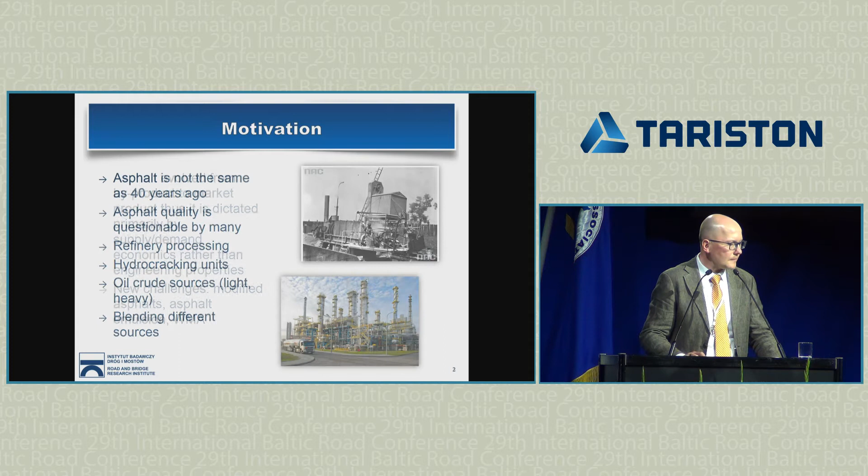Also asphalt evolved from what is called a byproduct—maybe when it started 100+ years ago it was just the byproduct of the crude oil refinery process. But right now it's really the product, the market product, governed by economics. And sometimes this economics is more important than the actual properties or engineering properties, at least from my perspective.

And also there are different challenges. We have newer modified asphalts, new additives added for a variety of reasons. Some of them may help, some of them may not—they may actually threaten some of the other properties, or affect them in a negative way. But also we have sustainability, the new big themes that we have to satisfy with our materials.

And also the other part of the motivation is: how do we check the quality right now? One of my favorite books is actually over 100 years old and talks about asphalt pavements, and these pictures are from this book. As you may recognize, this is an early version of the penetration method. The book is from 1920, and it talks about the penetration test, how it was developed in 1888. So almost 130 years ago, at least in Europe, we used this over and over again as one of the major checks for grading binders or asphalt.

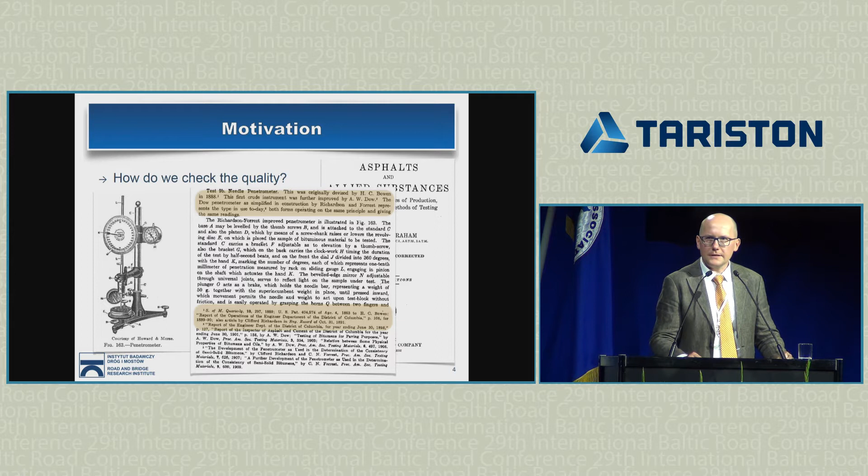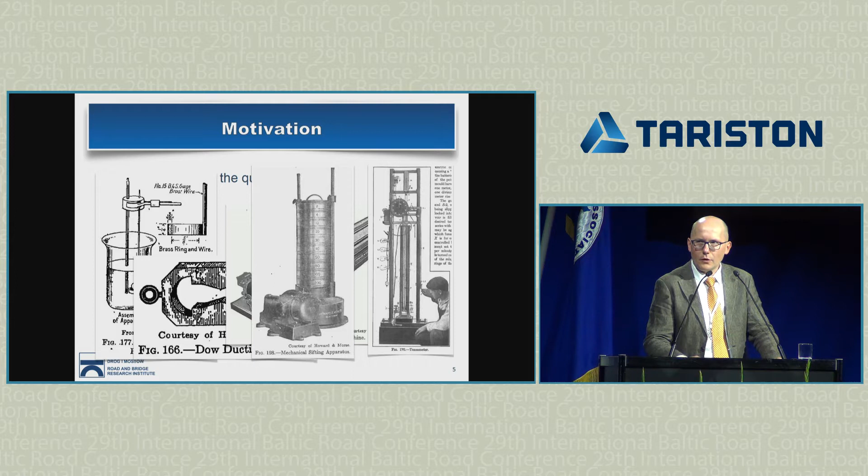And the other pictures, you may still also recognize them from the same book. There are different methods that we sometimes use even these days - sieve analysis, some tensometer, or some small load press. We have to realize that these are over 100 years old methods. For me, it's kind of bizarre.

In an even older book, from 1913 if I see it correctly, it says that even in those days, during the rapid development of cars and automobiles in general, the asphalt pavements or roads in general were undergoing a major change, or at least they were supposed to, because of the new cars, new methods, or materials and how they are actually used.

It's kind of amazing that they said this in this book, over 100 years ago. But looking at the pictures in this book, I mean, we didn't really progress much, yes?

And how come - we have this, as already mentioned this morning, new concept: automated cars, truck platooning, and different electric cars. And we, on the other hand, looking at the infrastructure, we're using something that is 130 years old.

I don't quite sometimes understand this, but I believe that we can do better, yes, with chemistry-based methods, for example.

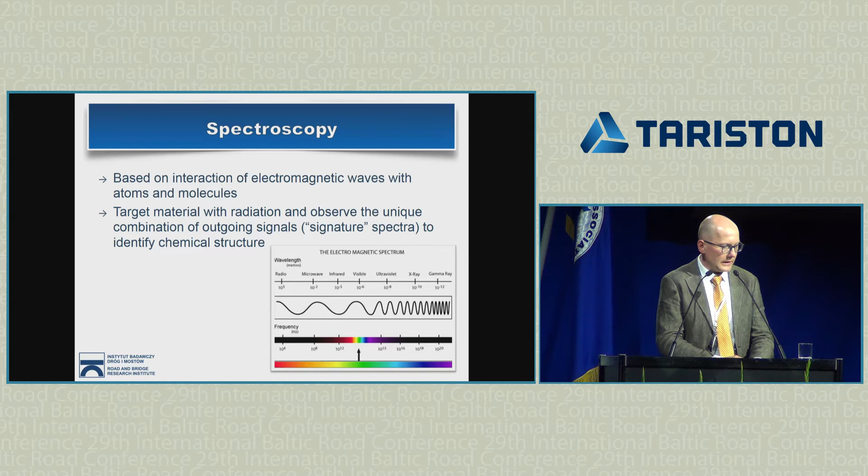You just direct the light at the sample - maybe it's easier on this next slide - and then not just the light, but the particular frequency of the light, in one of the regions, either X-ray or infrared or near-infrared or other.

And then when the light is interacting, there is some phenomena that is a clue to each of the different methods we will discuss. This is the clue, because each light or each frequency causes a different phenomena happening in the material. And then we have some sort of detector, typically, to look at what is coming out after interacting with the material. We have to measure, of course, what is going in, and then we have to measure what is coming out from the material.

And then we record this or interpret this into some meaningful information. Of course, each of these steps still has some changes because these methods, devices, or methodologies are still evolving. This is part of material science that works on these kinds of materials. We as engineers should use at least the ones that are more established, and look for new developments as they are approved or established with time.

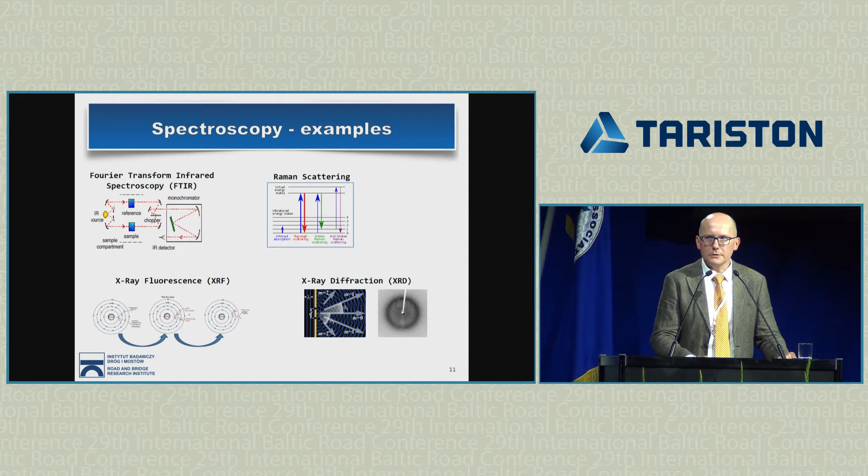Some of them are not suitable for asphalt due to its nature or composition, but when we talk about soils or cement, some of them are perfect for these materials. So there is some knowledge behind which method is better or more suitable for what material. But this information is out there - it's not a secret which method is good for what.

So we can talk about the thin layer first. I didn't do anything - so this is not my presentation. Okay, oh, this is my presentation. A little bit up. Slide number 12.

So when we start, not with a typical spectroscopy method, but we talk about chromatography, it's a little different part of analytical chemistry. If I can simplify this, it's like a sieve analysis for our material - in this case, asphalt. We do the sieve analysis to see what is inside our asphalt, what is bigger and heavier, what is lighter, what fractions. As you may remember, we have SARA fractions - asphalt is composed, at least in some theory, of 4 fractions that we can separate or detect using chromatography.

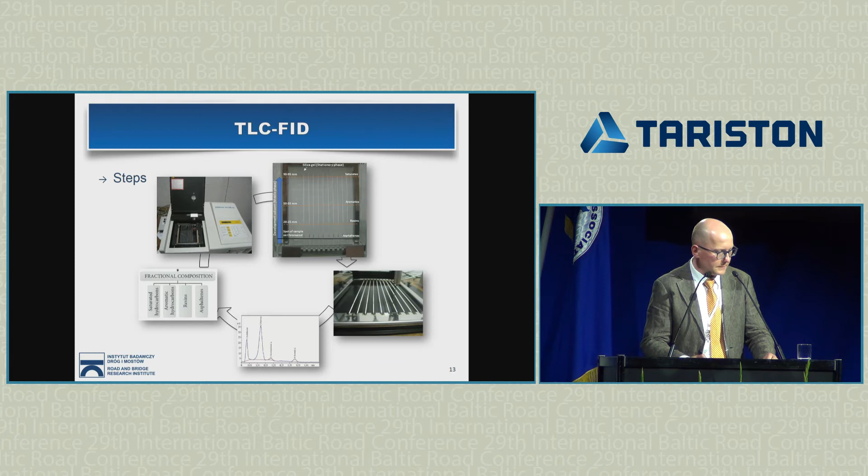With this, you can obtain the spectra shown at the bottom of the slide, which will show you most of the time 4 peaks for unmodified binder. If you calculate the area under these peaks, the area is proportional to the content of these fractions inside the material. So it's a fairly easy method - of course, the devil is in the details.

There are some details you have to work through, and there are different approaches even within this methodology, depending on who is using the device. But in general, the consensus is that it can give you the SARA fractions, and the SARA fractions are related to the performance of the asphalt.

So if you didn't do this exercise - in the original SHRP study in the United States, they actually measured the SARA fractions, of course with a different method than this one, but they do measure them.

And then they build the pavement sections with these different asphalts, and then you can try to correlate how these different fractions affect, assuming everything else stays the same, the performance of the pavement sections. And here are some of the results.

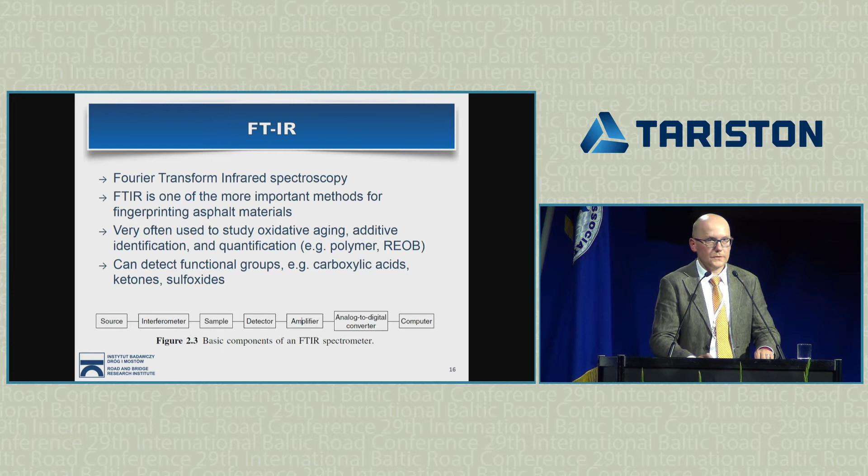We know that due to certain phenomena like aging, we can expect the growth of certain functional groups in our material. So when we observe these particular regions, which are very well established, or according to some of my colleagues, you can calculate where they should appear, then you can observe the sensitivity of different asphalts to aging and see how these functional groups are growing, and how fast. So you can detect functional groups like carboxylic acid, ketones, or sulfoxides, and they are all related to a particular place on the spectra.

To understand a little more how FTIR is measured: you radiate the material with infrared light, so the frequency is controlled by the machine. Then the molecules absorb some of this light, and on the detector you can measure how much light was actually absorbed by the material. Then you can plot it in the spectra, plotting the amount of energy absorbed versus the frequency.

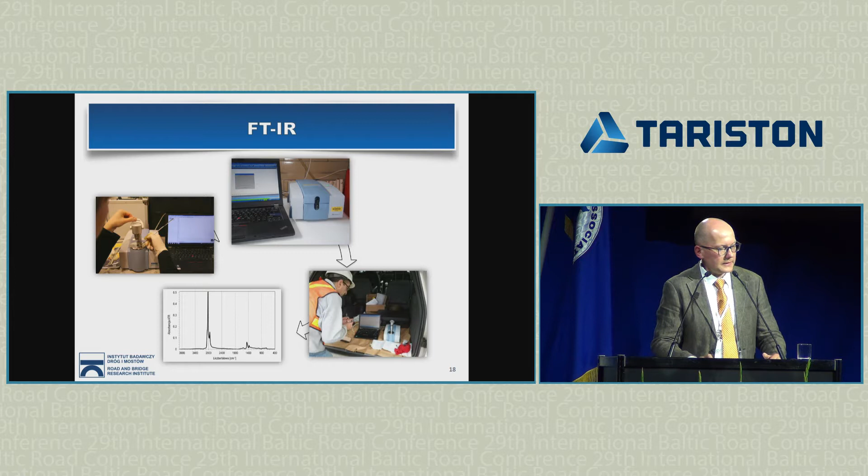The problem a little bit with this method is that this absorption of light by the molecules causes vibration of the molecule bonding. There is a whole theory that this vibration can cause stretching or bending of the bonds, or it can be symmetric or asymmetric. At least at the beginning, this might be a little overwhelming information.

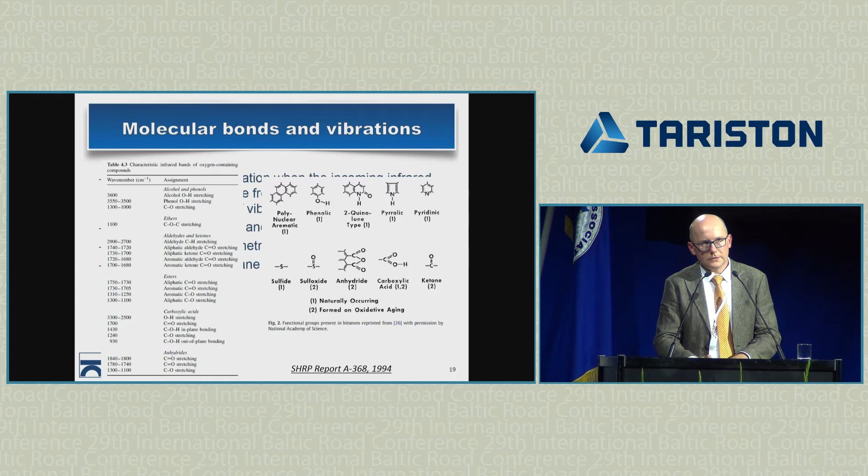You can see here from the SHRP report as well what type of classical molecules you can recognize in the asphalt. Some of them have very well-defined locations where they should appear on the IR spectra. Here you will also see the frequency on the left-hand side along the y-axis, and you can also see some overlapping.

Sometimes if you add an additive that overlaps or partially overlaps with one of the well-established regions in asphalt materials, the interpretation might be challenging. But in general, this is not the case, at least for regular applications of the IR.

There are a few different methods of IR. I will not go into details of this. You can do it in transmission mode typically, or attenuated total reflectance, and they are depicted on this figure and also in the paper. Plus, you can use diffuse reflectance.

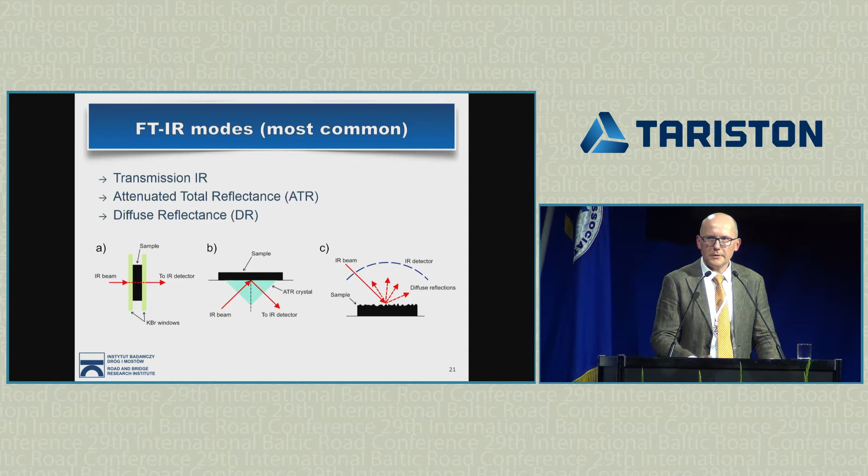The sample preparation is very simple, at least in the ATR mode. You just put the sample of asphalt, stick it to the window, a small window about 2 by 2 millimeters, and do the measurement.

And the last method is XRF, X-ray fluorescence spectroscopy. This is used to determine different particular individual elements. So first, in chromatography, we had the SARA analysis. Then in IR, we have functional groups. And here we are looking at the individual elements of our material. So if we know what should or should not be in the asphalt, then we can use the XRF.

And here, as you can see, the examples are using this in PPA, or polyphosphoric acid modifications, or with REOB, recycled engine oil bottoms modifications, or crumb rubber. You will also see it in the asphalt.

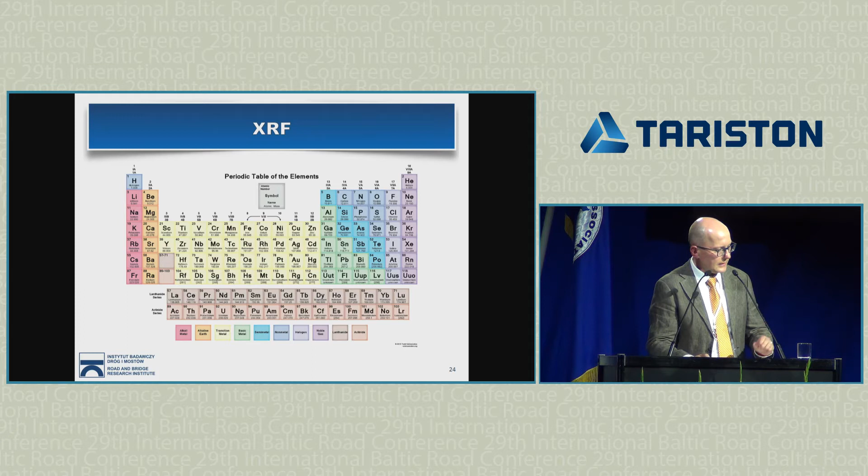In the previous slide, you could see XRF can detect everything from sodium to uranium in the periodic table. How it works is when you direct the X-ray light at the material, the atoms change energy levels. When they change energy levels, they emit fluorescence energy, and you can measure and detect this radiation and its intensity. When you have both the radiation and the intensity, you can tell what elements are there and how many of them there are. So this is both a qualitative and quantitative method.

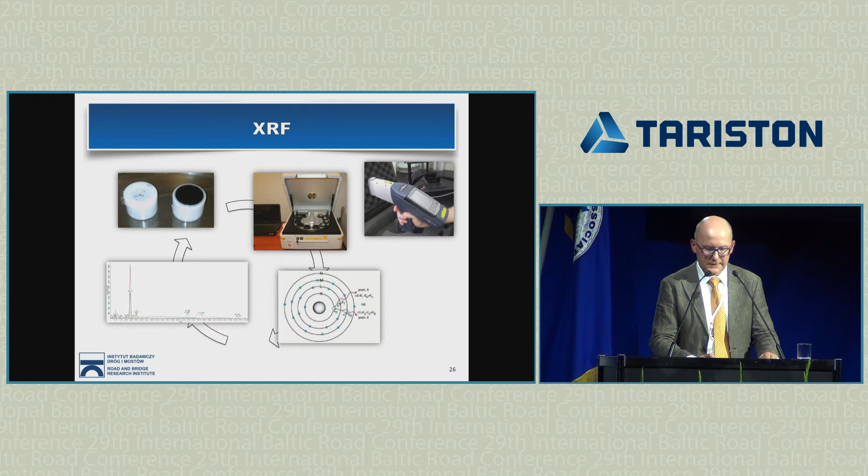Here, just to show you an example of the device, this is a stationary device with a carousel where we can put multiple samples, and you'll see the schematics of electrons jumping from one energy level to another. This is also an example of the portable device, similar to one shown in a previous presentation in the previous session.

Okay, almost finishing. We also have other methods you may hear about at different conferences, and maybe some were mentioned or will be mentioned here. You have ultraviolet spectroscopy, NMR, MS, TGA, DTA, different chromatography methods, SEM and FEM. Some of these overlap, but most of the time they have a very specific use, at least how we use them in the asphalt industry right now.

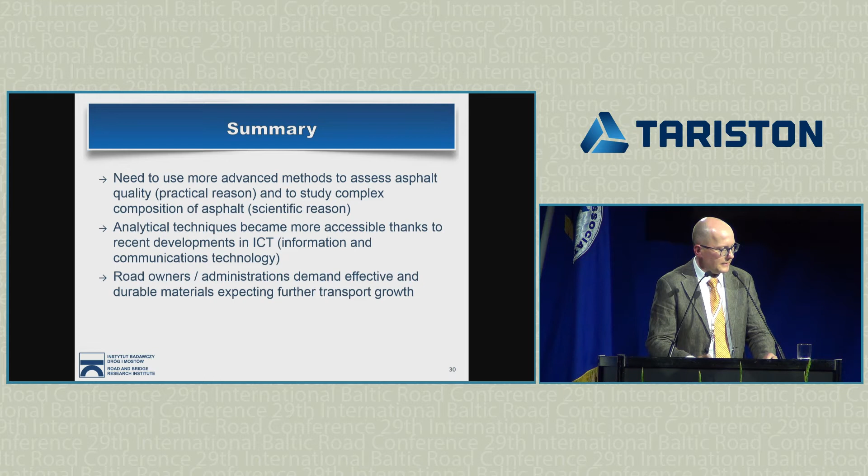So in summary, in my opinion, we use more advanced methods to assess the quality of our asphalt and study its complex composition. As I mentioned, these techniques evolve and are very small these days, very accessible. It was not the case like 30 years ago—some of these devices were the size of a room, or didn't even exist because the technology wasn't there. And road owners demand effective and durable materials because we expect growth in our transport.

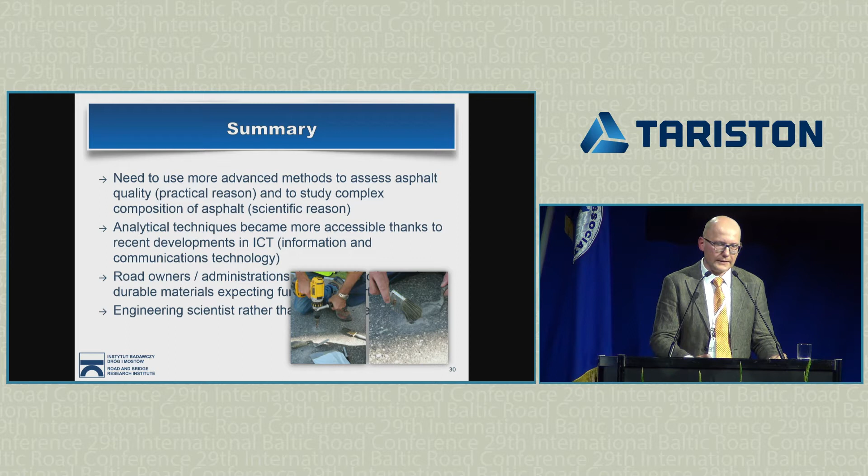And also, sometimes being a civil engineer is not enough—we should be more like engineering scientists these days, because we should understand a little bit of the causes, what is happening with our material. It's like this: we drill the pavement, for example, and just measure this dust, and you can do it with the FTIR. So no more cores, like 150 millimeters.

And going back to this caveman that I forgot to mention on my first slide—what I wanted to show is we just need to know how to use the right tool for the right job, the right application. This caveman knew he needed to use the hammer. The hammer evolved over the years, so he understood the concept of how to use it, and we still use the same hammer, which was okay in this case. But with some of the tools we use these days, it's not necessarily the case anymore. Okay, thank you.

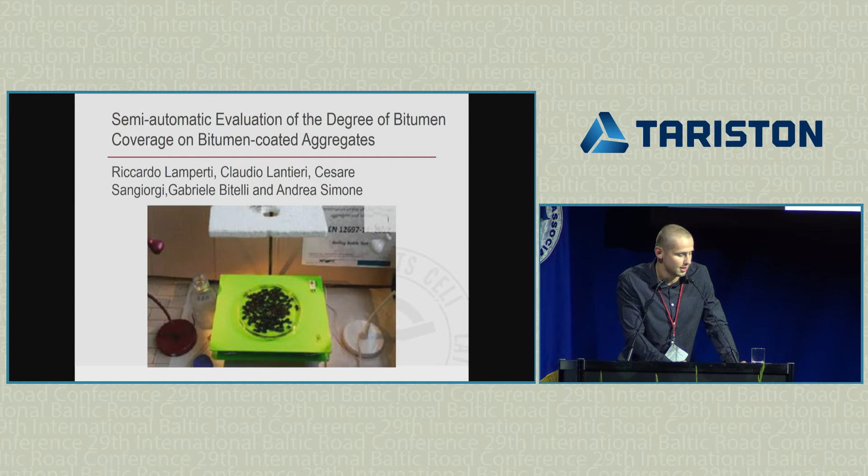So I used three kinds of different minerals in different colors: dark granite, red granite, and pale dolomite. And I mixed it with bitumen 70/100. The specimens were prepared by the standard, as you can see in the pictures of how I actually did it.

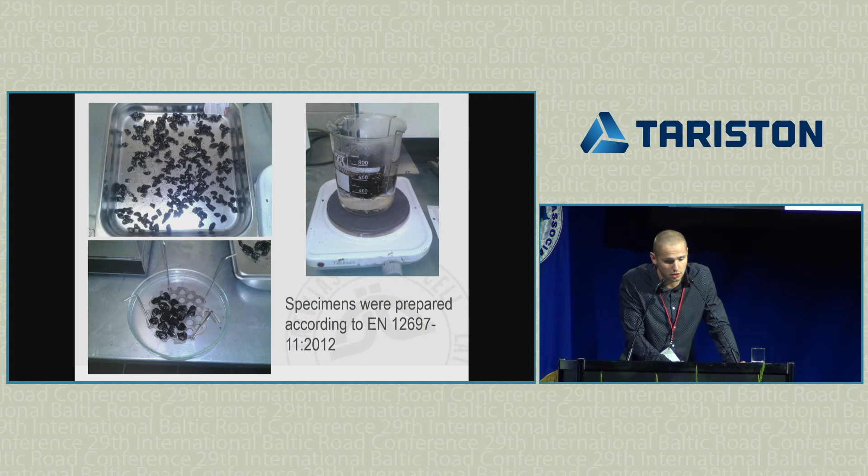For the processing, I used the program ImageJ. I selected it because those guys from Italy used it too. I thought I'd try it, and if it was bad, I'd try Photoshop instead. But I used this, and I was satisfied because it was very easy to use, so I stayed with it.

On the picture on the right, you can see my self-made photo studio. Actually, it's pretty simple—there's only two lamps, a bowl with water, and the specimen in it. On the left, you can see how the picture looks after I took it.

As I said, those guys from Italy had some imprecise things, and the main two problems were shadows from the minerals and reflection from the lights. So I tried to remove them, and I actually did it. I soaked my specimen in water, which helped take off that reflection, and I put the bowl with water and specimen up to 30 centimeters from the green background, which helped take off the shadows.

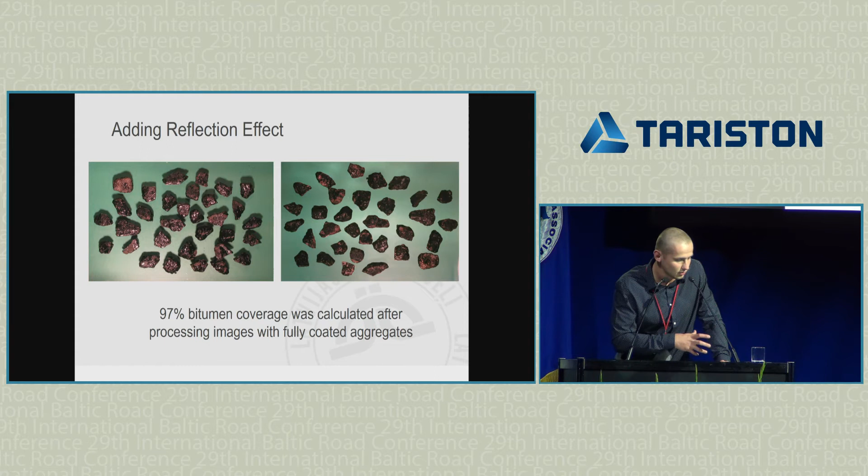But when I tried to calculate the coverage of bitumen with the photo processing method for fully coated minerals, I calculated only 97% coverage, meaning I had somewhere around 3% loss. I think there's a little spot from reflection, so I took this factor into calculating too.

Here you can see how I work in this program. Actually, it's pretty simple—we're just regulating three things: hue, saturation, and brightness with the regulators, and with them we separate the white spots from the black spots. Here you can see how I already separated the black spots from white spots, and down here we can see the calculated area which we need to know.

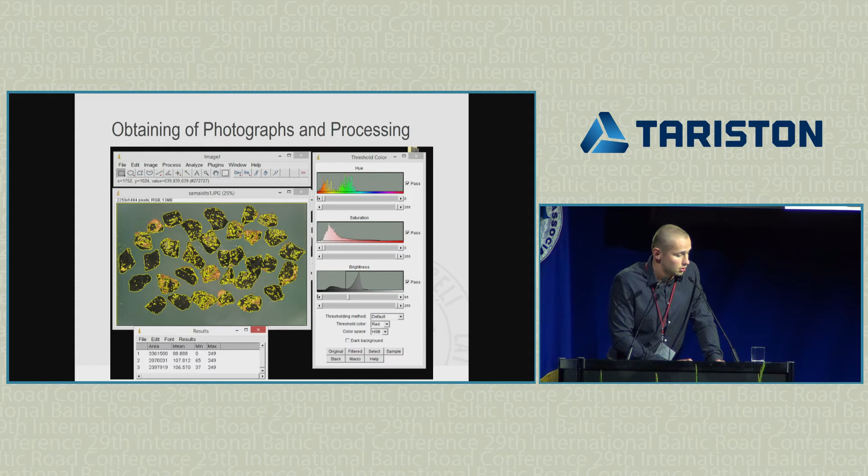Let's talk about calculations now. To calculate the coverage of bitumen, we need to know three areas: the whole area of the photograph, the green background area, and the total area of green background and spots covered with bitumen. If we know those three areas, we can calculate the mean coverage of the bitumen.

So the results. I tried to take photos in two different ways. The first type: I took a photo, then turned each mineral around and took a second photo. The second type: I just mixed the specimen, took a photo, mixed it again, and took another. The purple beam is the average result from three operators for the first and second side. The green beam is from the mixed specimen, and the beige beam is from visual processing. As we can see, for the dark granite, the difference isn't big.

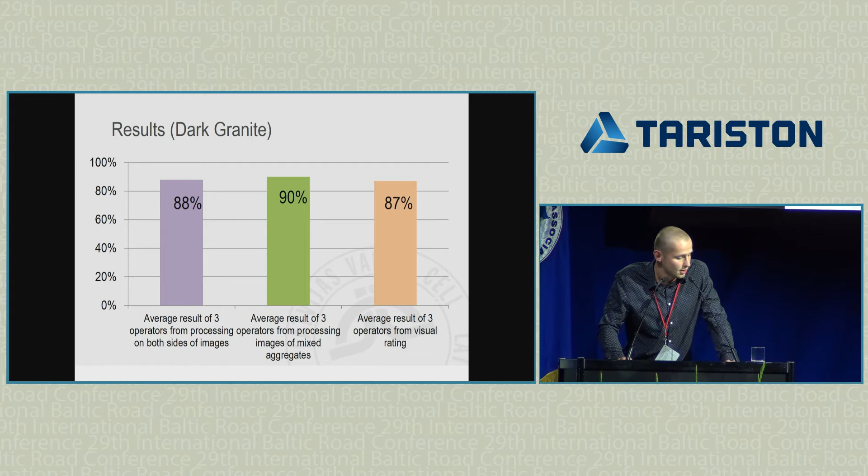For the red granite, the difference is bigger, about 7% between the visual method and photo processing. The photo processing method shows a lower bitumen coverage. And for the pale dolomite, the difference is the biggest, about 10%, which is significant.

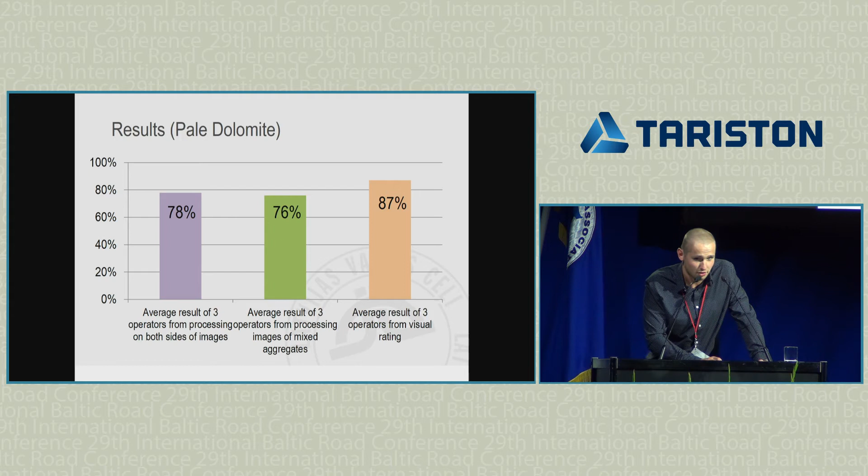So after those 3 specimens, I get some conclusions. First, in general, the photo processing method shows a lower bitumen coverage. Is it closer to the truth? I don't actually know. We need to explore it further.

If the aggregate is lighter, the photo processing method shows a lower bitumen coverage. As we saw for the dark granite, it was simple - pretty much the same.

Both image acquisition methods are equally accurate. As we saw for all 3 specimens, there was only a 2% difference between those two types of taking photos.

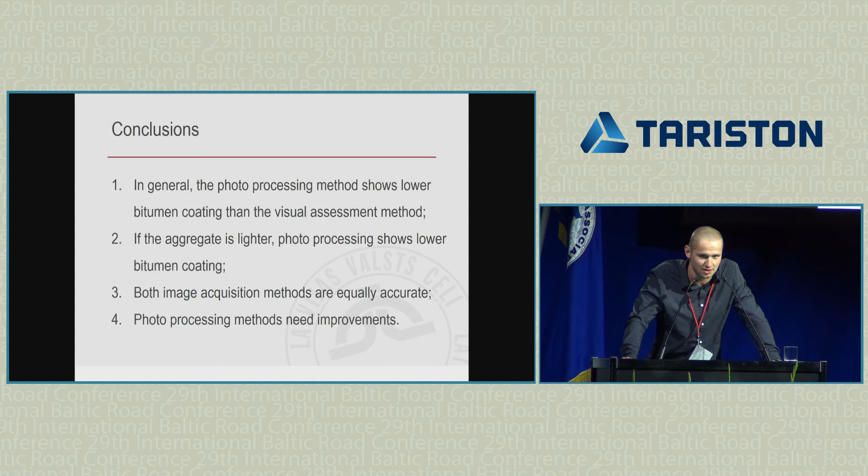And the photo processing method still needs some improvement. It's for sure, because in the future, as I see it, we will have only the specimen, put it in, then press some button, and after a few seconds we will have a result. I think the visual method is too old. We are moving forward - it's the 21st century, we have good technologies, and that's what I did. It's only one step, so we've got a lot of steps to do further. Thank you.

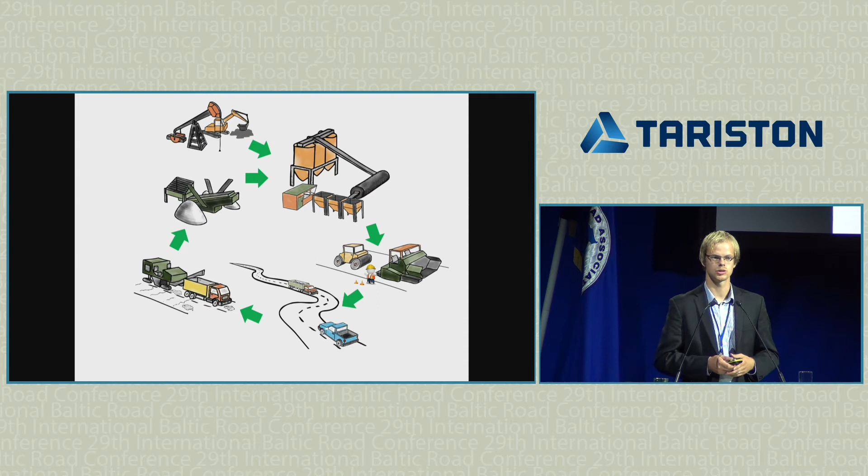And obviously, we want to pave and use the mixture as a normal road as we would do normally. So a rejuvenator is a sort of oil. It's not really rejuvenating the binder chemically - otherwise we would be using it on our faces and be forever young. But it does provide the mechanical performance of the bitumen that we want for another service period of the pavement. So we want some softening effect, we want to regain the elasticity of the binder, and so on.

The types of rejuvenators can be different oils, starting from, as someone mentioned here, waste engine oil. It could be a refined oil, vegetable oil, pine oil, or whatever. There's no real definition at the moment.

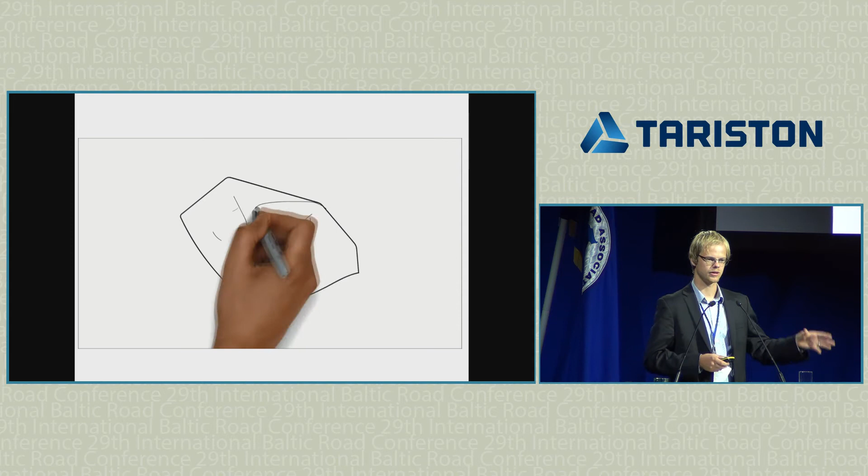Now the problem: if we have an aggregate covered with a binder film and we apply a rejuvenator on it, the rejuvenator is covering the binder film from outside. So in order to blend together, it has to first diffuse into the old binder film. And that's not really so simple, because the diffusion and mixing process will depend on the aging state of the old binder, on the rejuvenator itself, and on the temperature used in the mixing plant.

It will depend on the time of exposure to temperature. So there are all these factors that affect the result. And the result will, in most cases, be blending or binder activation somewhere between 0 and 100%. We probably will not be able to activate 100% of the old reclaimed asphalt binder.

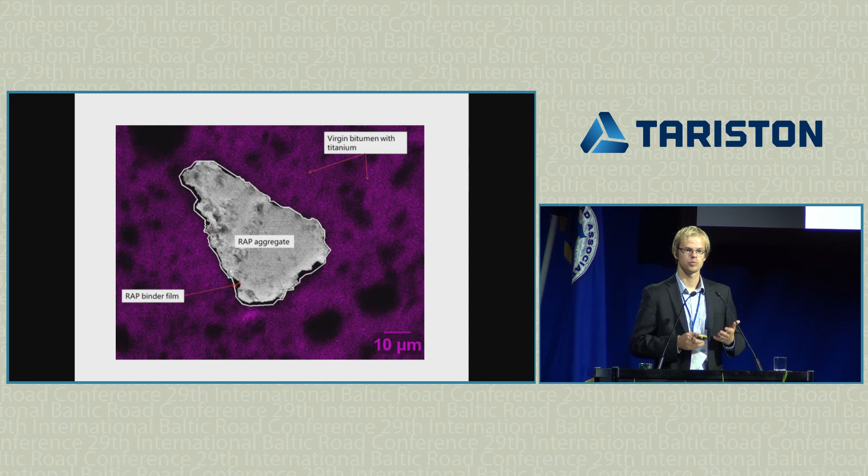So the question is how to do it the most efficient way. Of course, there are different rejuvenators, different plant technologies, but one thing we have to decide is how to add the rejuvenator. The normal way, or traditional way, is usually after heating of the reclaimed asphalt, in the mixing drum, there's an additive dosage system. So we can add the rejuvenator there.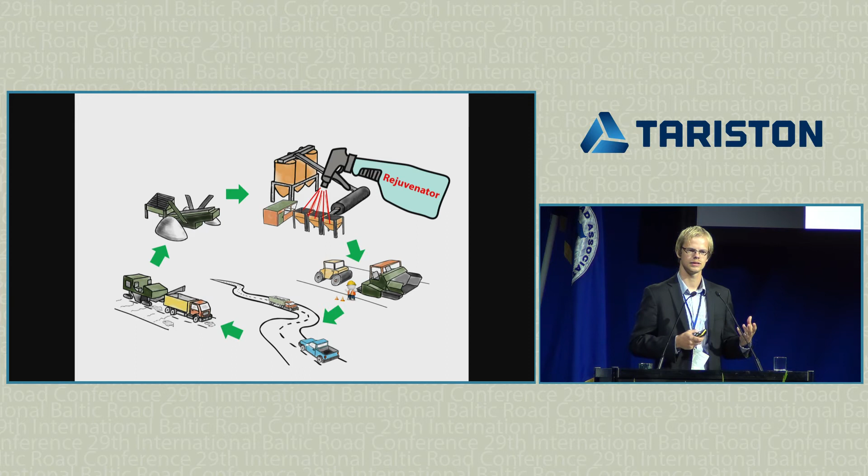Sometimes it's also added to virgin bitumen. This would be kind of creating your own soft binder grade. But who is to say that we cannot add it earlier? The longer the rejuvenator is in contact with the binder, the more diffusion we will have, the more binder we can potentially activate. So we could add it to the old asphalt before it's being heated, the cold reclaimed asphalt. We could add it even earlier when we're processing the material, maybe even during the milling operation.

We actually went ahead and counted that there are potentially, theoretically, 10 different locations where we could add the rejuvenator. You see the blue ones are upstream of the recycled dryer drum, the yellow ones are downstream of the dryer drum, and the purple ones are in the virgin bitumen line.

In this example, somewhere around number 3 are the cold storage bins, then the material goes up in the tower, it's being heated there in the hot dryer, and down in the tower there's the mixer.

What we want from these different options is not only maximizing binder activation. We also want it to be environmentally safe, so we have to check what conditions make it safe. Some options are disqualified right away because, for example, we don't want the rejuvenator leaking into the ground, so we cannot add it in the stockpile.

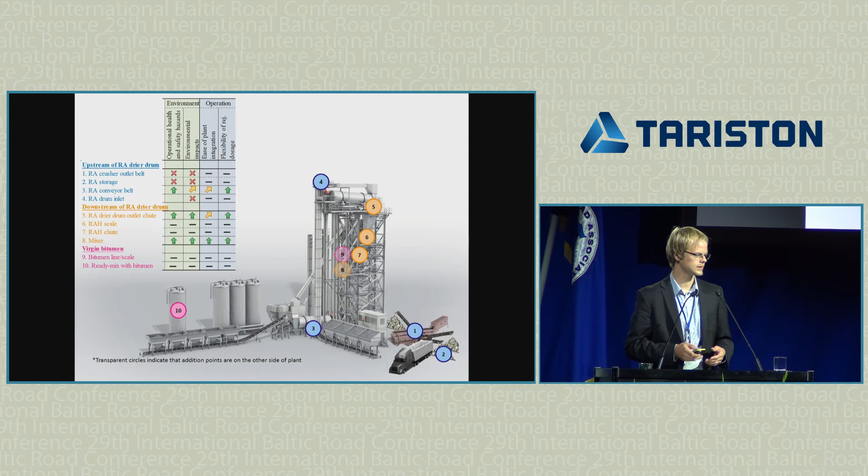Next, we want to be sure it is technically possible to add the rejuvenator somewhere in the plant to control the dosage and integrate it into the plant system. Finally, we want the mixture to have quality, the rejuvenator to be precisely dosed, and the resultant mixture to have its properties as designed.

So at the end, based on this theoretical calculation, we saw there are 3 different options. Two of them are quite similar, so we decided to focus on two of them, and we went ahead, actually, in an asphalt plant, and tried these two different options of rejuvenator addition.

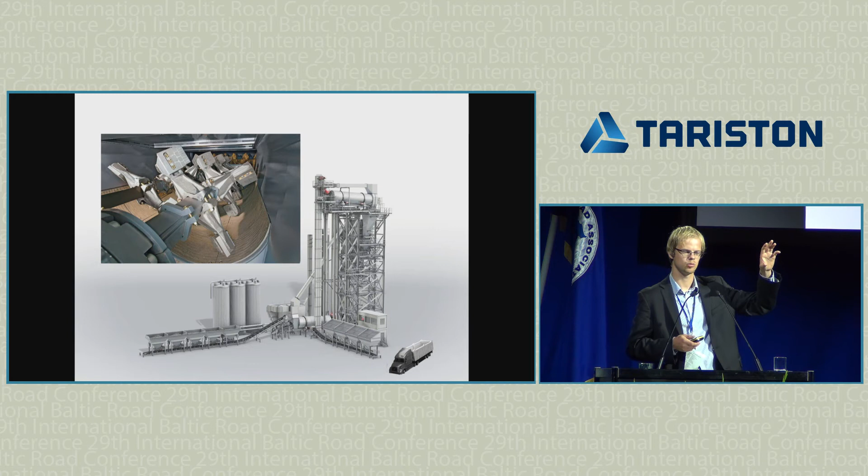One of them is adding the rejuvenator after the reclaimed asphalt has been heated in the mixer, right, that's somewhere here. The other option is to add the rejuvenator to the cold asphalt right after it's leaving the cold storage bins on the belt. Here we are able to control the dosage based on the volume of the material. Okay, so that's here.

Now we have two additional locations, but I actually have five different places to take samples. First, I have just a wrap sample, taken before adding the rejuvenator. Next, right after addition of the rejuvenator to the cold asphalt, meaning we sprayed the rejuvenator on the cold reclaimed asphalt and sampled the mixture cold. Next, the same sample went through the heating drum, so we sampled it hot.

Next, we sampled reclaimed asphalt that was heated without any rejuvenator. And finally, we had a sample where the rejuvenator was applied hot, and it was sampled hot.

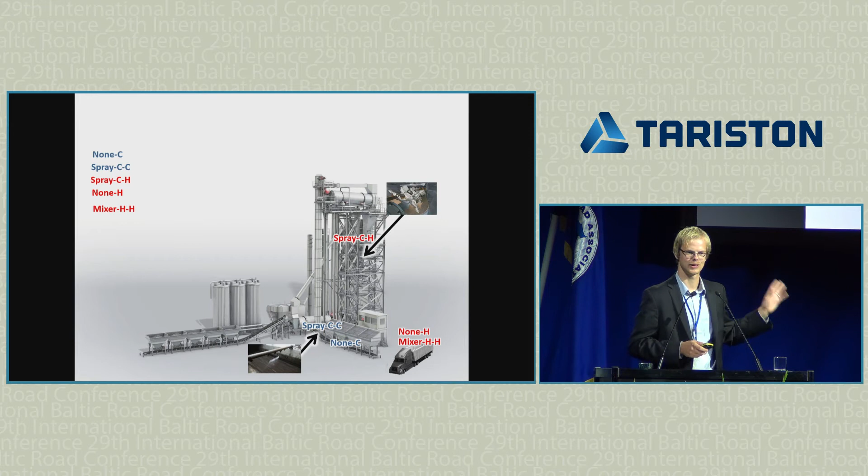I know it's a lot of information to take on, so if you feel like sleeping for a while, that's fine with me. I'll wake you up in the conclusion section. That's going to be very easy, I promise.

So now I have my 5 different addition spots, and I wanted to have 3% rejuvenator dosage at each of these spots. Unfortunately, since this is a real production process, the reclaimed asphalt binder content varied. So although my dosing was the same for each case, since the reclaimed asphalt binder content varied, my proportion of rejuvenator also varied a little bit. So instead of 3%, I got somewhere between 2.6 and 3.1.

That would be fine for an actual production process, but since this is a research study, I had to somehow take this into account. So what I did is take my samples that were sampled hot, the one without any rejuvenator and the one where I added the rejuvenator in the mixer, and these are the baseline. I know these are the same; the only difference is that the rejuvenator content is different. For one it's 0, for the other it's 3.11%.

If I connect them with a line, I can say that if the only difference between any of my samples would be the rejuvenator dosage, the samples would align on this trend line somewhere. If there is some other effect, like aging in the drum or loss of some rejuvenator, the result would not be on this line. As we can see, the penetration difference between this line and the different samples is actually very small, about 1 to 2 decimillimeters. That's nothing, considering all the steps we did: producing, extraction, measuring, and so on. So I can say that based on penetration, the addition spot didn't make a difference.

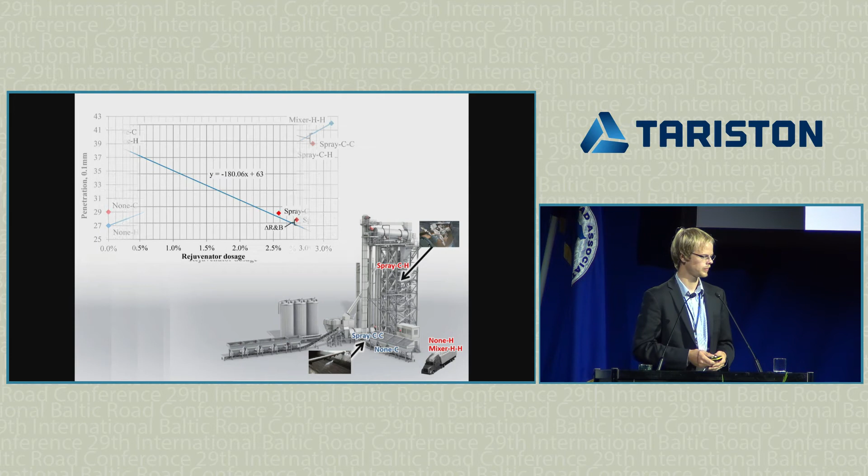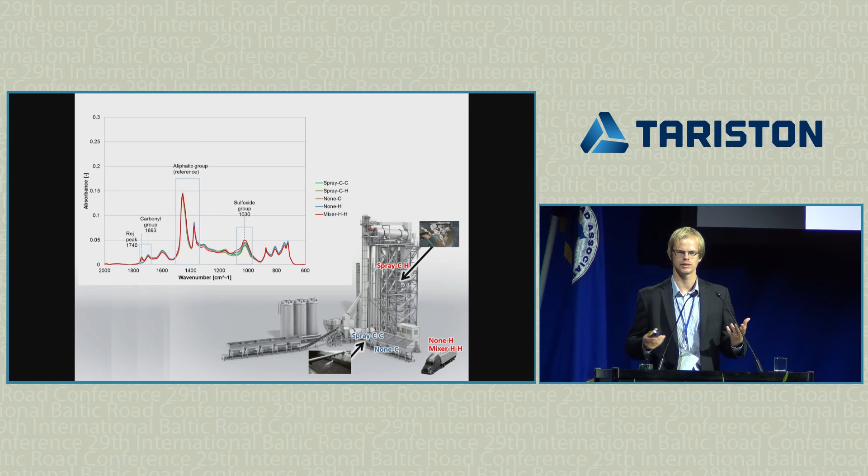Okay, so now the conclusion, and it's very simple: the rejuvenator addition point did not make any difference with respect to the binder properties. Regardless of whether we added it to cold wrap or hot wrap, the effects were the same on the binder. It took me quite a lot of effort to find this out. We produced tons of asphalt mixture in an asphalt plant, did all this extraction work and testing. But actually, the conclusion that we don't see any difference is a good one, because we know it's not worse adding the rejuvenator before heating of the wrap.

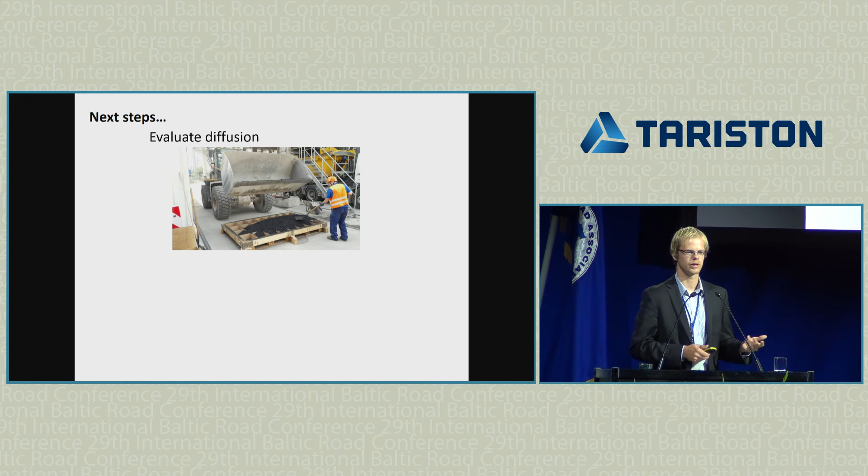Whether it's better, I cannot answer at the moment because we haven't done any testing on the mixture. As I said, when we extract the binder, we blend all the materials together, so in this case we artificially assume 100% blending, which is not what happens in the real world. In the real world there is probably less blending, and we have to find that out by testing asphalt mixture, which is what we intend to do. We have already gathered samples and will perform the testing on asphalt mixtures.

In addition, during production we measured the emissions, which concerns the first part of the evaluation, where I said it has to be environmentally safe, both to the crew and to the environment with respect to pollution. So, thank you very much. With that, I will conclude.

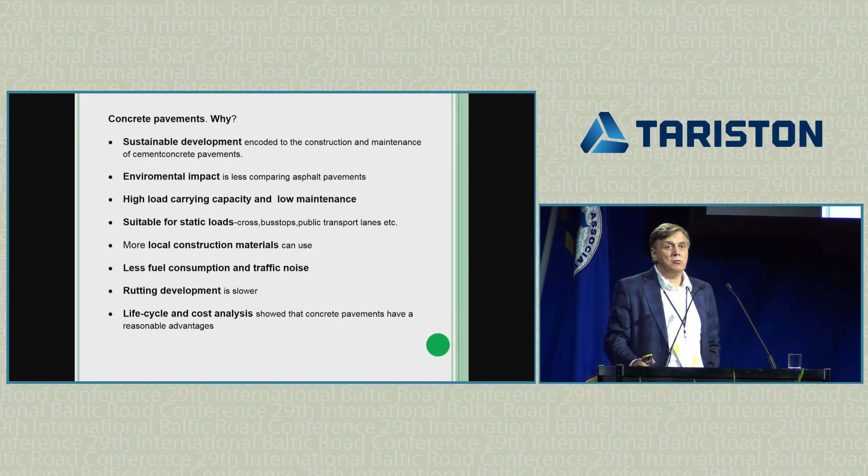I think for somebody this is a trivial story, but it belongs to the more applied science and experiences. Why concrete pavements in Tallinn? Here are some important issues why we decided to build concrete pavements. The most important reason was to get some real experiences. But as I said, the devil is in the details. Concrete pavement is more suitable for urban situations because in urban situations we have more static loads, cross bus stops, public transport lanes, and so on.

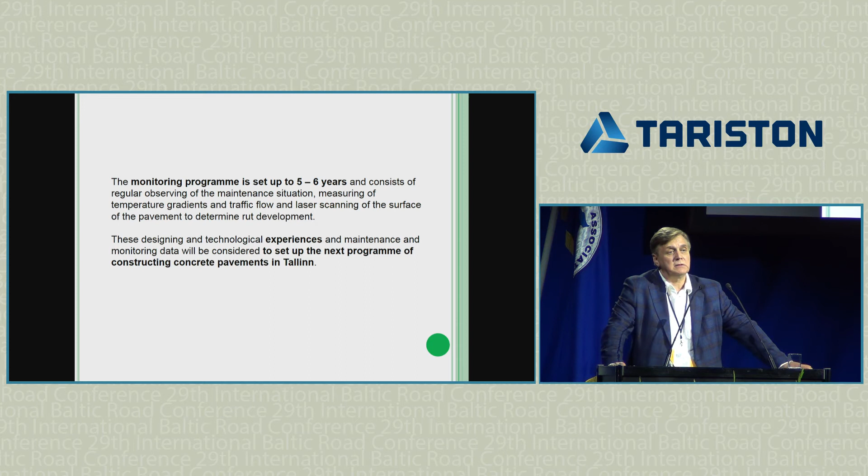This decision was made in 2013, and this project was implemented in 2016. It took 3 years to complete. The next step for us is monitoring of this experimental section. I think it takes about 5-6 years and consists of several issues: maintenance situation, measuring of temperature gradients, traffic flows, and laser scanning of the surface of the pavement to determine rut development. In conclusion, if we have good results, then the idea is to set up the next program of constructing concrete pavements in Tallinn.

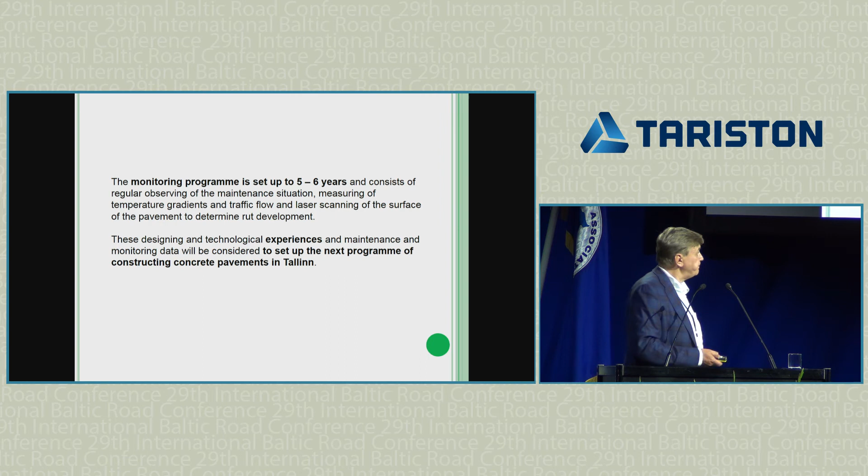The concept of construction of the experimental section was to use the existing asphalt concrete pavement structure and combine it with new pavement construction in widening paths, as you saw in this video. And of course, we did geotechnical investigation and bearing capacity tests of the substructure.

Then we control the level of groundwater. It's very important for this frost heave resistance question. The frost depth in this region is approximately 125 centimeters. As I said, the properties of soils and existing pavement substrate materials are suitable for requirements in terms of bearing capacity and frost heave resistance.

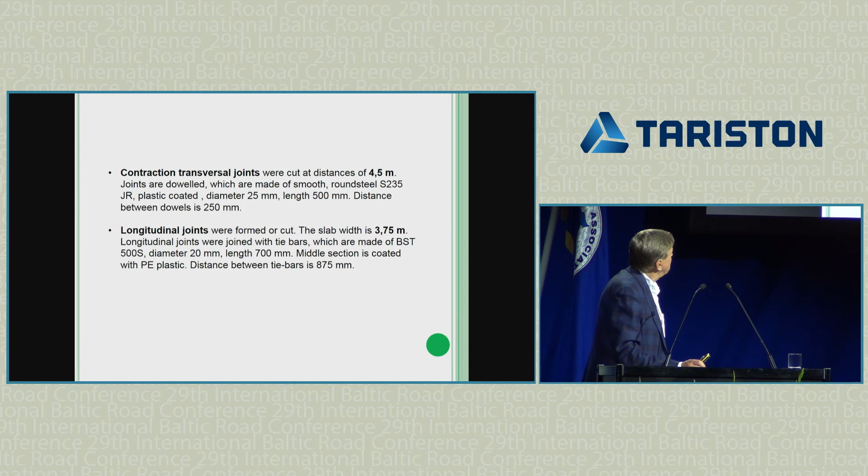Contraction transversal joints were cut at distances of 4.5 meters, and for longitudinal joints, the slab width is 3.75 meters. Of course, joints were doweled, and longitudinal joints were joined with tie bars.

The location scheme of this section of concrete pavement is near Lake Ülemiste. It is one of the main roads of Tallinn.

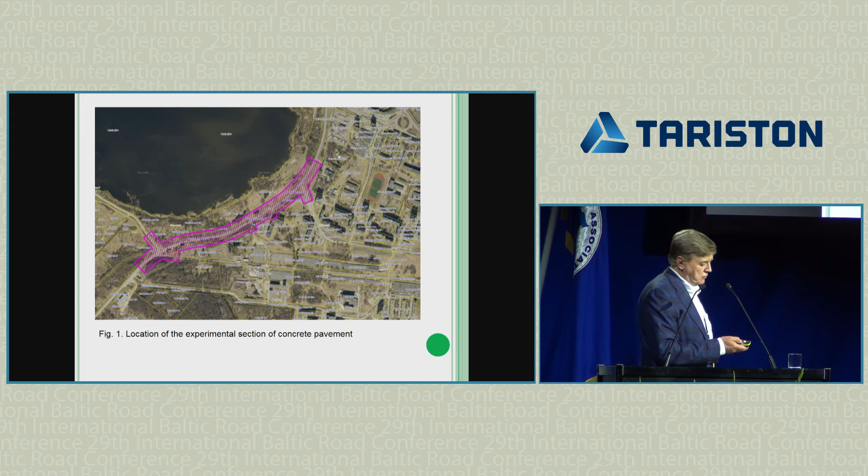What we are interested in is the design method, and we use the current Swedish design method combined with additional aspects of German and Dutch design methods. The most important issue is using the Miner-Palmgren damage hypothesis for flexural stresses. That's the base of this designing method. Here is this well-known formula.

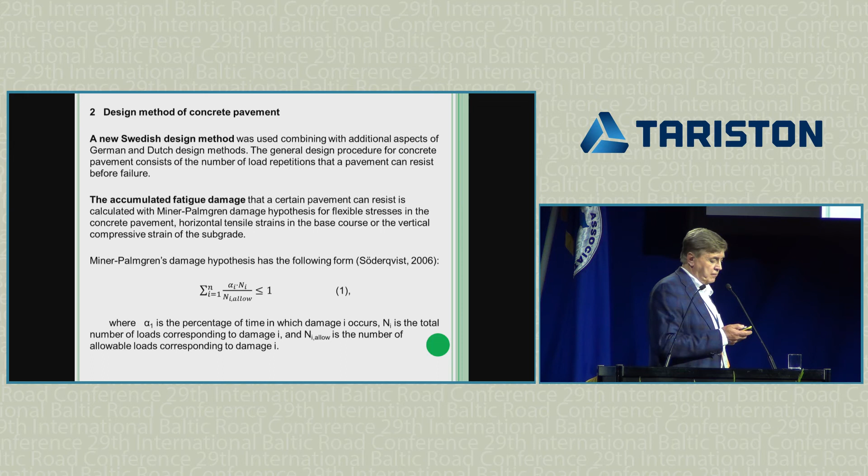Regarding traffic, this designing of concrete pavement must use data about traffic. The average annual daily traffic is approximately 18,000 vehicles, and the total number of estimated equivalent standard axle loads per 40 years is 23 million.

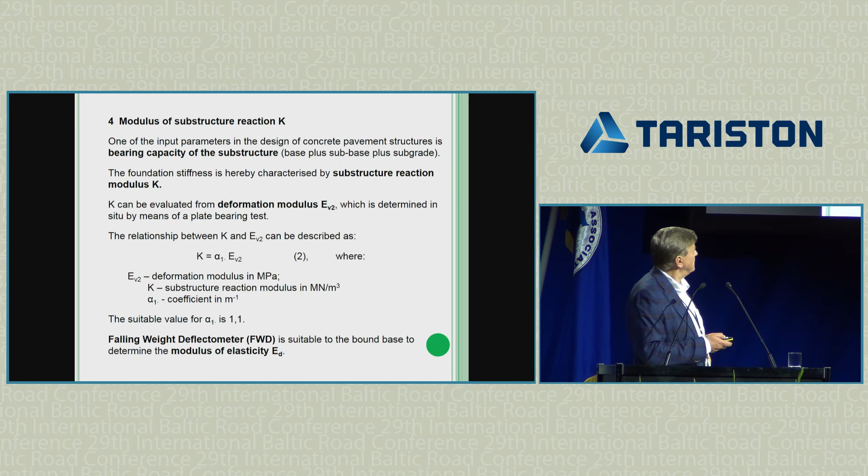What is interesting for us is how to evaluate this substructure reaction modulus K. As you know, K has a functional connection with the deformation modulus EV2, and in my report I have brought these formulas. For bound base, it's impossible to use the bearing plate test. So we used the falling weight deflectometer and evaluated the elasticity modulus ED. ED is a dynamic E-modulus, and its connection with the static modulus of elasticity is shown here. K can be expressed through this formula.

One most important issue is the temperature gradient. We used Swedish data about these temperature gradients. This raises a question about our own situation, but we were very conservative and used Swedish data, with temperature gradients of 60 degrees Celsius per meter occurring 20% of the year.

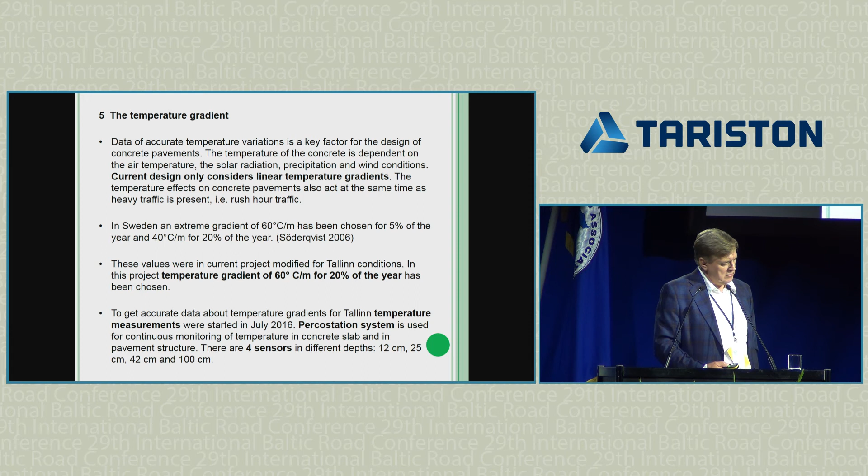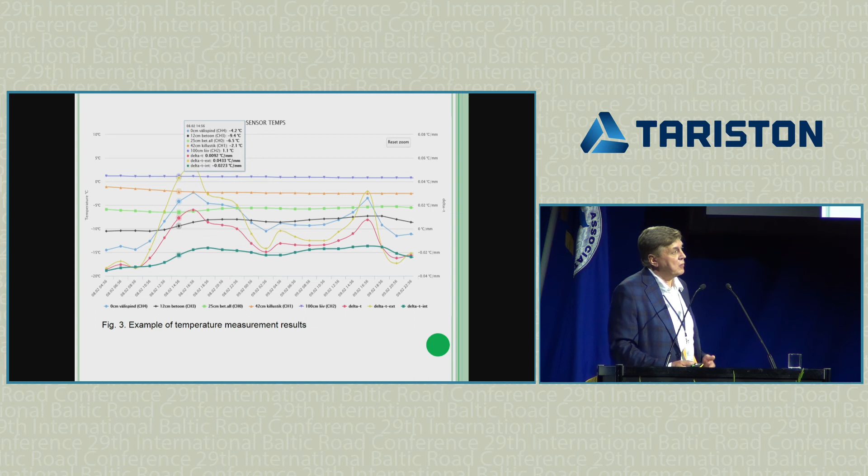To get accurate temperature gradients for Tallinn, we started a temperature measurement program using the Percostation system, with 4 sensors at different depths: 12 centimeters, 25 centimeters, 42 centimeters, and 100 centimeters. Some illustration about this Percostation - we get the actual temperature situation of the pavement every 2 hours. After 5-6 years, we can draw conclusions about the more accurate temperature gradient situation in Tallinn.

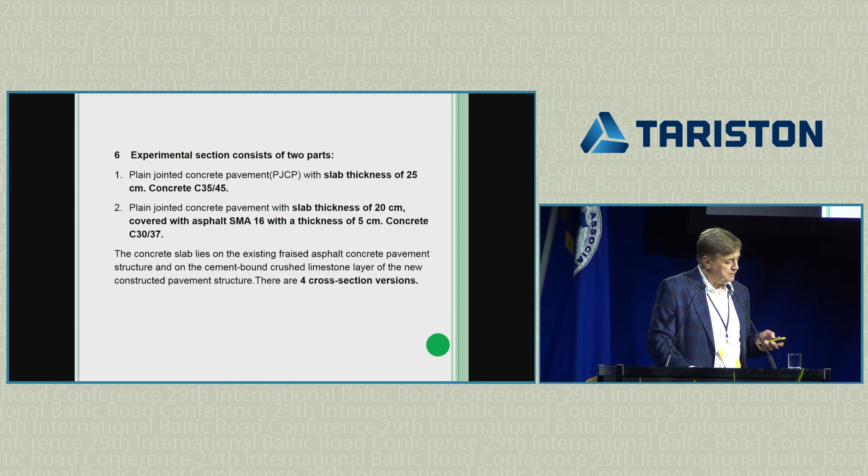As you saw, the experimental section consists of 2 parts. One is a plain jointed concrete pavement with slab thickness of 25 centimeters, and the second is a plain jointed concrete pavement with slab thickness of 20 centimeters covered with 5 centimeters of stone mastic asphalt. This illustrates the 2 versions of these cross sections.

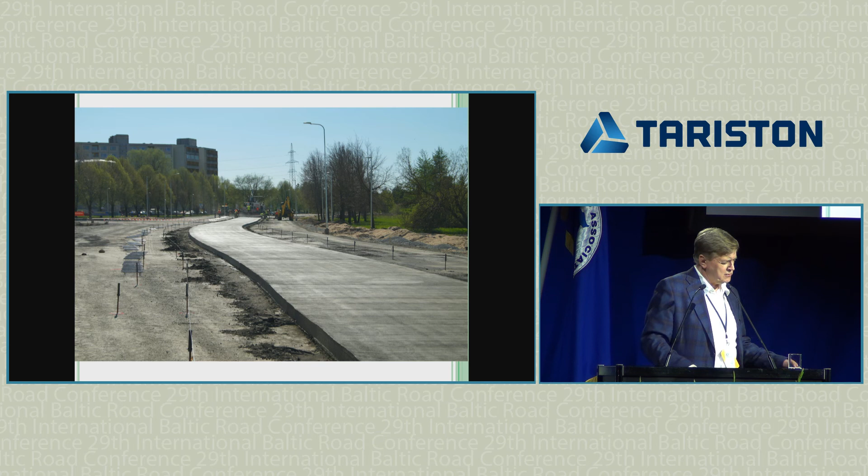Some well-known pictures about this making process and monitoring program, over 5-6 years: regular observing of maintenance situation, cracks appearing, joint situation, etc. Plus temperature gradient measurements by Percostation, groundwater level measurements by special well, and laser scanning of the surface.

The reason is to determine the settlement, unevenness and blowouts of pavement, and determine rut depth development depending on traffic frequency and cost. Some example illustrations about these laser scanning results.

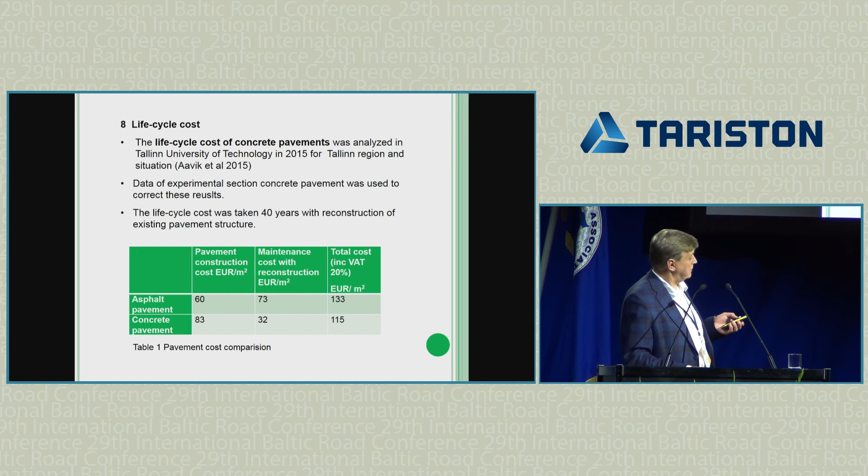A very important question, of course, is cost. Life cycle cost of concrete pavements was analyzed in Tallinn University of Technology in 2015, but using this experimental section we have a possibility to correct these results. What we find is that for 40 years, this will cost 15% less compared to asphalt pavements. That supports the same investigation we have heard in Poland, Czech Republic, and Lithuania.

In conclusion, of course we need more information to make new decisions, experiences and research. But the most important issue, of course, is that we must create our own local Estonian mix design using our own Estonian cement and avoiding alkali-silica reactivity with aggregate. That's the main question.

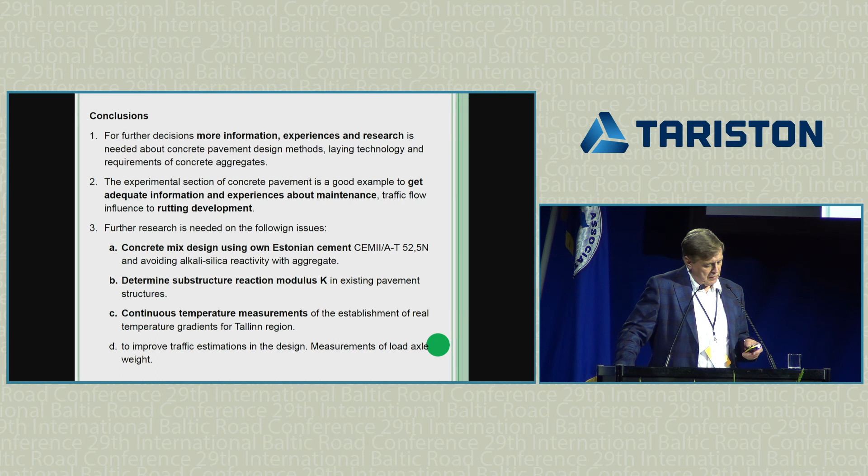To determine substructure reaction modulus in existing pavement is a very interesting issue, and as I said, temperature measurements to find accurate temperature gradient. And to improve traffic estimation in design, measurements of load, axle weight, and maybe a new correction of the adjusted coefficient for several tires.

Now here is one famous guy from Estonia who has big experience, who has built many thousand kilometers of concrete roads, not in Estonia, but in Australia. Thank you.

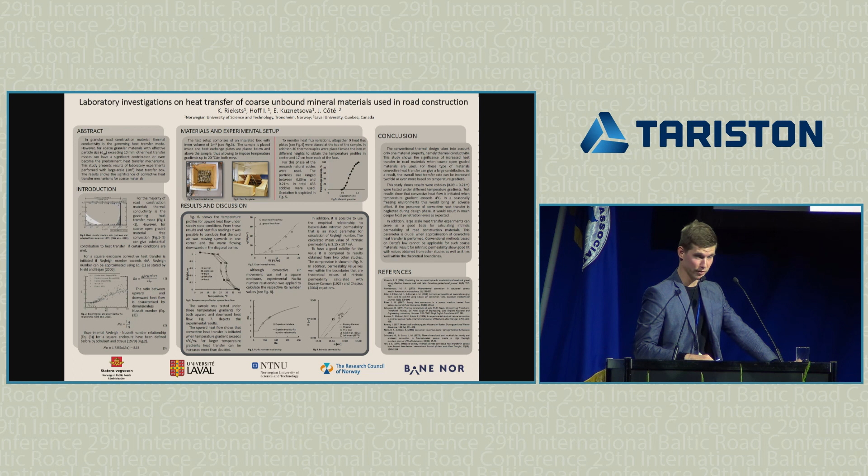Because once you have this alignment for the rails, if you have a high-speed train going there, you need... and if you start getting frost heave problems, the rails are misaligned, you have to drop the speeds significantly. So my part in the project is about thermal properties of materials.

Everything starting from fine materials, also the clays, and going up to really coarse materials. In Norway, they use much coarser materials than in the Baltics, I guess. Sometimes the particle size, for example a typical subbase is from 20 millimeters up to 120. So pretty big particles.

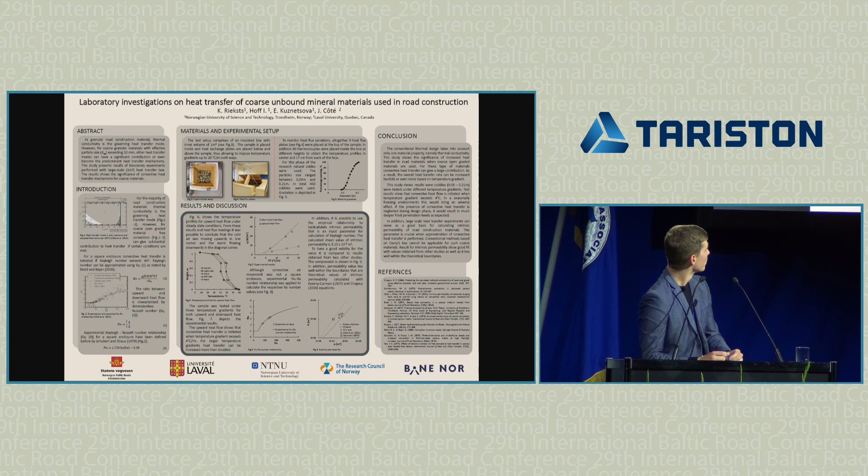So when it comes to this research, can you zoom in on those two pictures? So what do we have in the project for the thermal studies? We have a small-scale experiment, which is only for the thermal conductivity. It's not shown here. This one is a large-scale experiment. The sample size is around 1 cubic meter.

So there's a huge box which is filled with materials. This in particular was a kind of a trial study. We filled the box with cobbles, which is not the typical road construction material. We did it because we have some other data that we can compare what's going on. So the material is put inside a box.

On the right-hand side, you can see those are heat flux devices. They're measuring the energy which flows through the sample. Different temperatures are applied at the top and the bottom.

So what happens? You can have two different directions of the heat flow. When the heat is moving downwards, it represents the summer conditions when the heat is stored in the ground. And when the heat moves upwards, so in case of the box you have a hot bottom plate and cold top plate, it represents the winter conditions when the heat is extracted from the ground.

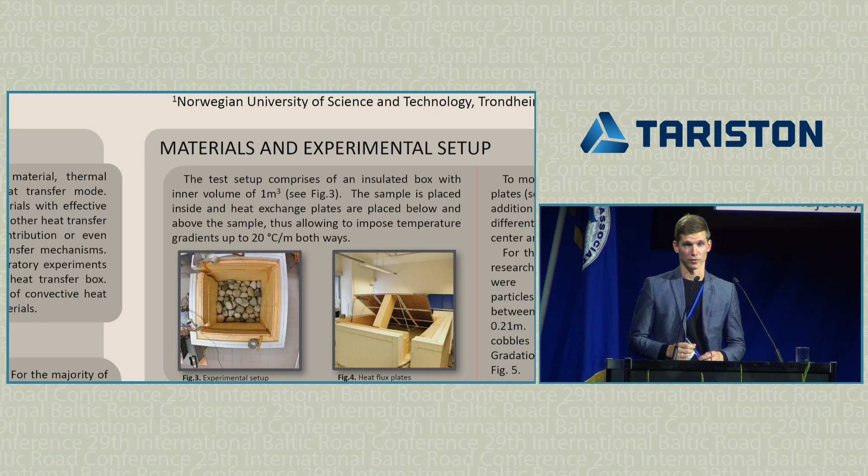This test explains different mechanisms of heat transfer that can occur for these coarse materials. The most typical mechanism of heat transfer is thermal conductivity. That happens for every material, everywhere. Now, if you slide a bit down to this graph on the right...

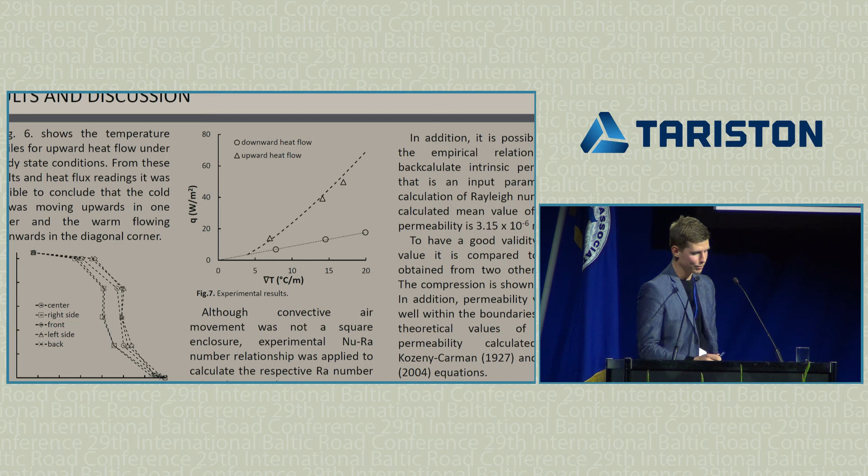So the graph which is in the center shows different types of heat transfer. Basically, the dotted line represents the thermal conductivity, which again represents the summer conditions when the energy is stored in the ground.

The thermal conductivity is the slope of the line. So if you divide the heat flux, which is on the y-axis, by the temperature gradient, you can calculate the thermal conductivity for this particular material.

And then the dashed line represents the winter conditions. When the ground is warm relative to the temperature of the air, the heat flux is significantly increased. So for each temperature gradient on the x-axis, you have a significantly higher heat extraction rate.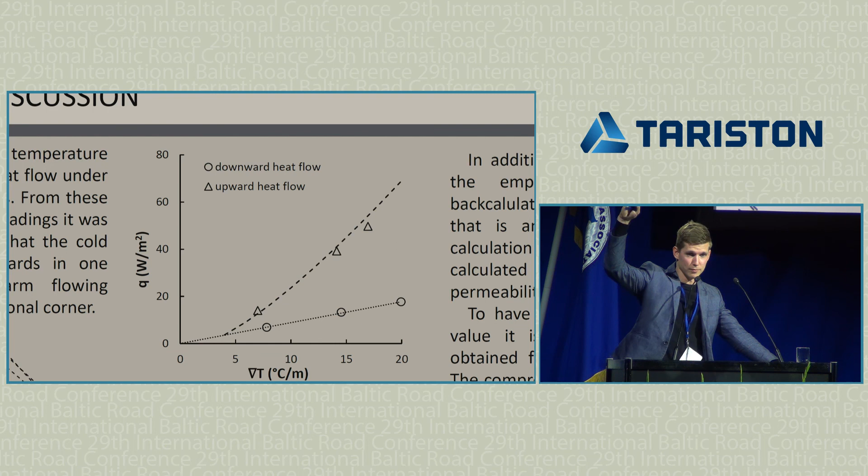The reason for that is that there is another heat transfer mechanism going on during the winter time, which is convection, natural convection. If you don't know what it is, the simplest explanation would be: when you turn on the heater in your room, the air gets warmer above your heater, loses its density, and starts rising. Consequently, the cold air from the top of your room goes down because the density of the cold air is higher. The same thing happens in the ground as well.

Convection can form in terms of a kind of air rolls, and it's a fluid flow in this case. But whenever there's a fluid flow, it takes with itself a portion of the heat as well. Every particle of the air takes some portion of the heat out of the ground. And therefore, during the winter time, you can have a much higher rate of heat extraction from the ground.

A normal thermal design takes into account only the thermal conductivity. That's what's typically been done. In this case, if you have coarse materials like these, you can have coarse crushed materials as well. So if you neglect the fact that there is convection in these materials, you will underestimate the frost penetration rate, what happens in your materials.

After we did this test, we also tested crushed materials, also this kind of typical sub-base material that they use in Norway, which is without the fines, and you can have convection also in that material. I know at least in Latvia they use finer gradations, but they also produce materials without the fines. The railways usually use the typical ballast material.